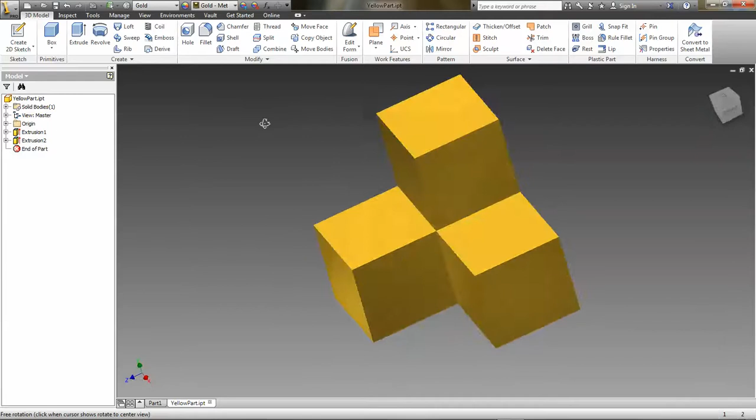This is the piece on screen that we're going to be modeling, and we've given this a nice sort of gold finish. I'm just going to minimize that, and I'm going to create the part from scratch. So open a new document, create a sketch, and we'll start sketching on the XZ plane.

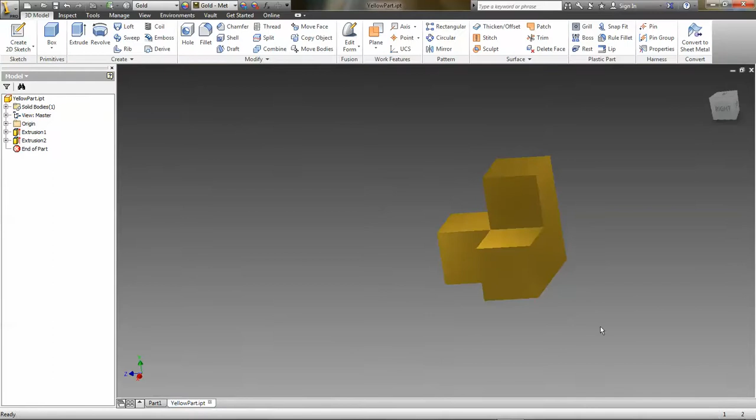Now remember, I'm going to go back to the finished model, it's always important to think about how you're going to model a piece before you model it, to keep the sketches and features to a minimum. Notice I've completely modeled this piece with only 2 sketches and 2 extrusions.

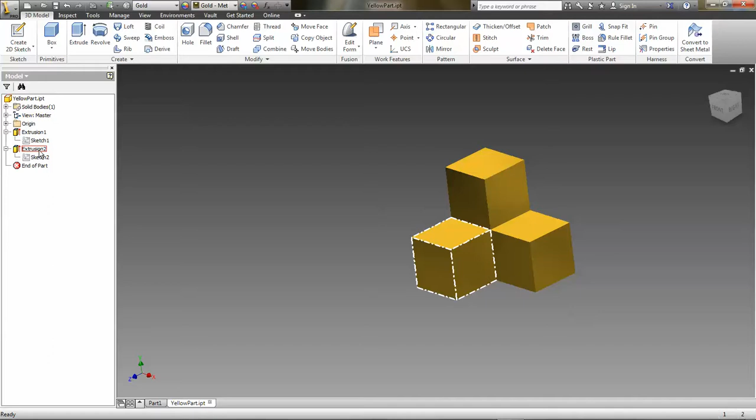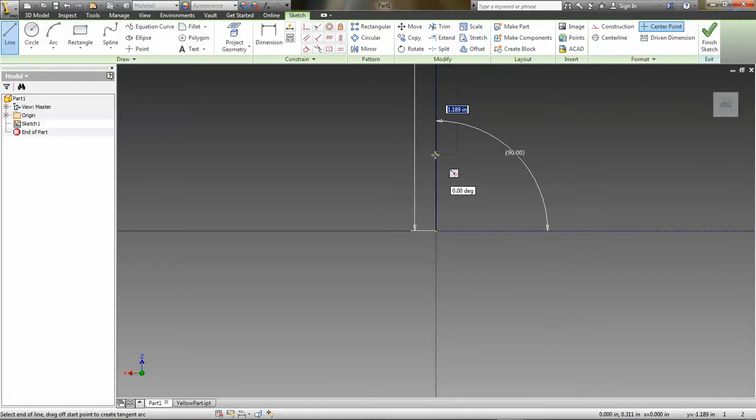So we're going to start by modeling this first one, this L shape, and then we're going to just add a third cube onto that. So remember, in the puzzle cube project, all your puzzle parts are made of 3/4 inch cubes. So we're going to start at the origin, and I'm going to go up 1.5 inches, 90 degrees. Click enter. Use my scroll wheel, my mouse wheel to scroll out.

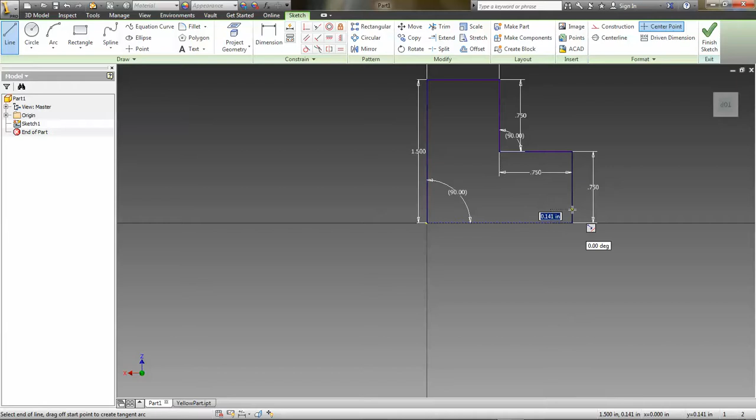And notice I'm typing in all of my dimensions on the keyboard. These are called numeric constraints, and that will allow me to end up with a fully constrained sketch when I'm done. So I can finish the sketch.

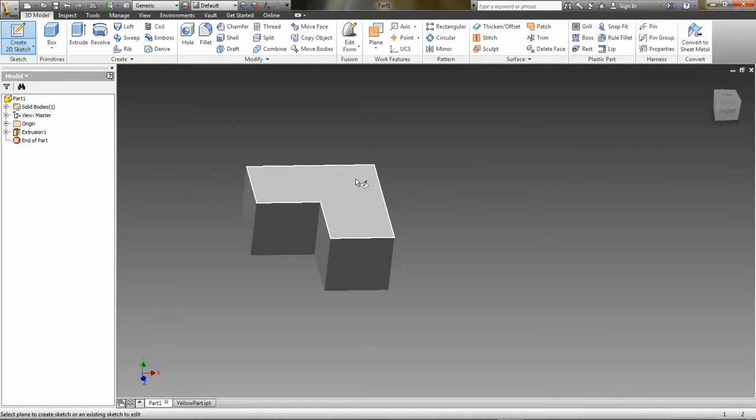Now there's my L shape, which I'm going to then go and extrude 0.75 inches. Now once I have a 3D model with some surfaces, I can then create a sketch right on any of those surfaces. And now I can just create a rectangle, and notice it automatically latches on the existing vertices.

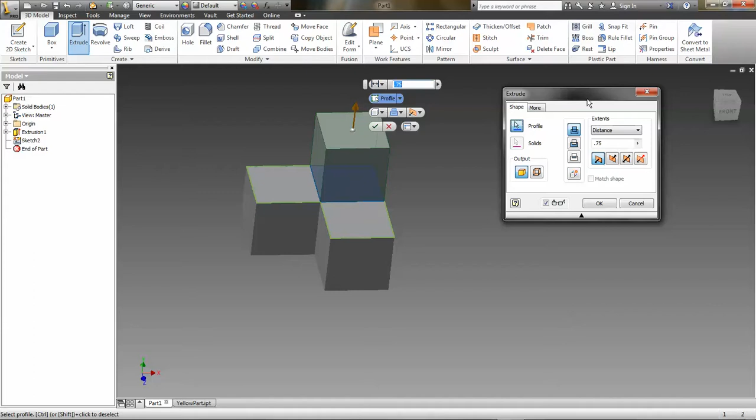Finish that sketch, click extrude, pick that surface, 0.75 inches. And remember, you can either use the dialog box or the marking menu. They're basically duplicate commands. The dialog box is the old style interface, and the marking menu is the new style interface. I wouldn't be at all surprised if eventually we see a lot of the dialog boxes go away, and you can configure which of these is shown.

So there's our model, but notice it doesn't have any real color or texture or anything. It's just the default gray, which you can see up at the very top of your screen. This has just some colors. Essentially, this is like applying a coat of paint. When you click on that pop-up menu, you can go down and pick this, I'm going to call this, I don't know, yellow part.

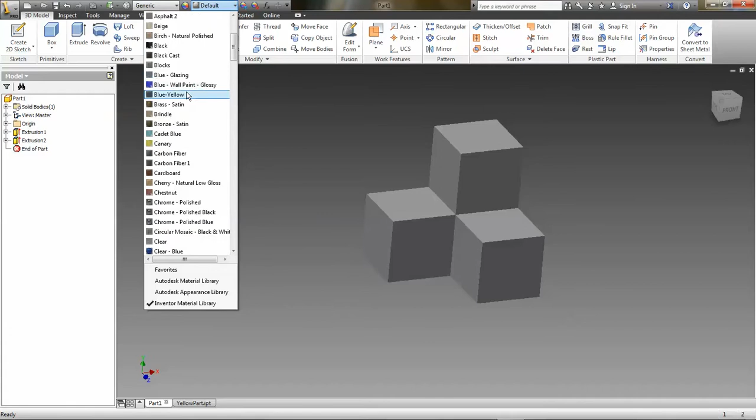And again, you're going to decide what color your parts are, right? So blue wall paint, that sounds good. And there, notice it's colored it blue. And all it did was really apply a coat of paint. In a future lesson, we'll learn how to actually create a material and assign a material to your object.

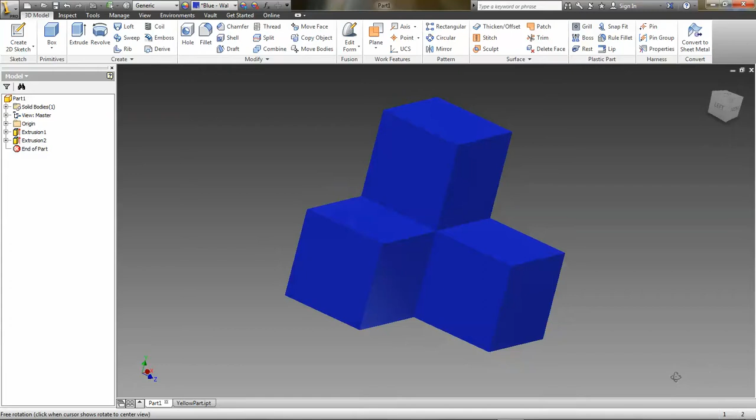But essentially, there's your finished model. I can orbit around, take a look at it, and that's all there is to it. Notice we're back to where we started. 2 extrusions made from 2 sketches. Now I could have done this in a more complicated way, but remember to keep your model simple. You'll be better off in the long run.